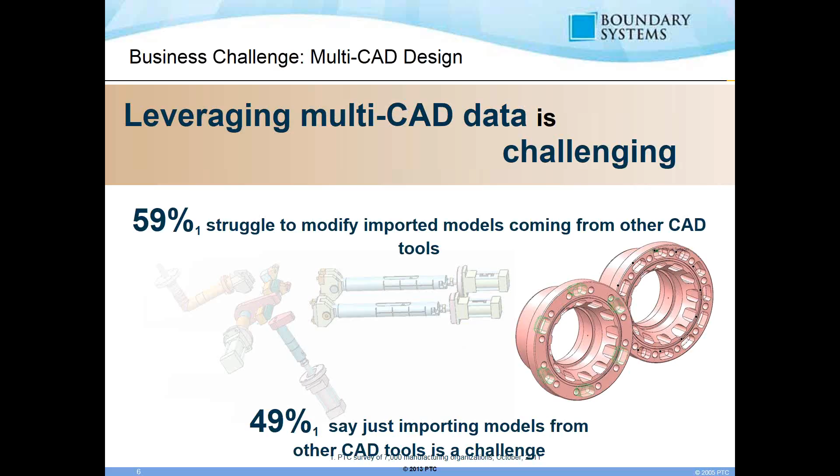Leveraging Creo, users will have the flexibility to make fast changes to geometry from any CAD source, essentially eliminating their MultiCAD challenges. These changes are similar to direct modeling capabilities, solving the challenge of editing non-native heterogeneous CAD data. In other words, I don't care what the feature was in the other CAD package that designed the geometry. All I care about is moving a certain edge or face over by a couple inches, without having to understand whatever the other software was, be it Catia, NX, or Solidworks. I don't have to know how to model in those. I just want to change the geometry, and I can do that very easily now inside of Creo Parametric.

Another benefit is managing change, particularly late-stage design changes. Change is prevalent throughout the entire product development process, but the closer we get to production, the bigger the impact of late-stage design change typically is, so it's critical that it's done quickly, so required tooling, manufacturing, and other downstream deliverables can proceed as planned.

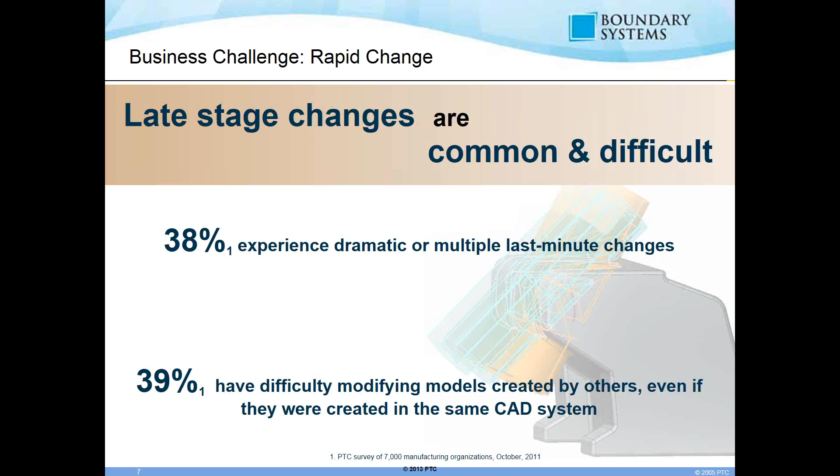The other challenge is migrating data. Company A acquires company B, and now they want to transfer CAD data from one system to another, and usually at that point it's paying for very expensive migration software, or paying for lots and lots of man hours of computers and servers churning out hundreds of thousands of CAD data from one software to another.

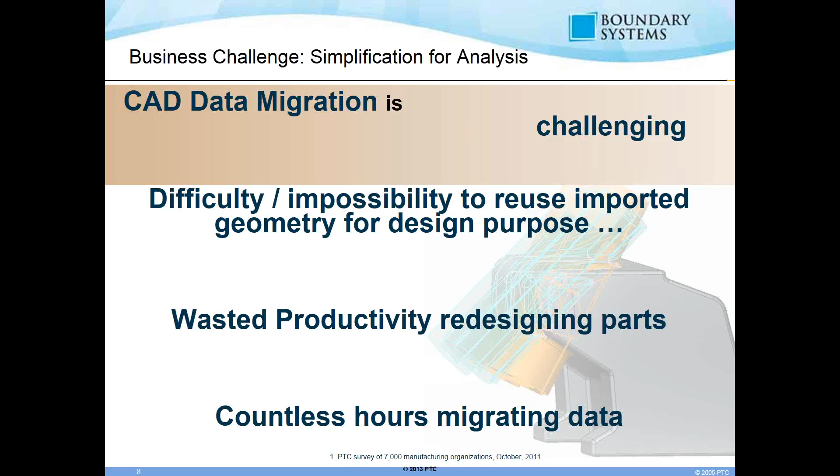PTC Creo Parametric virtually eliminates that particular need because Creo Parametric can very easily open MultiCAD data from Catia, NX, and Solidworks. This means you can start making changes or migrating your data on the fly. You don't have to spend a ton of money migrating all the data up front, only to find out you only use 10% of it. As you need the legacy data, you can migrate it into Creo Parametric, open it natively, and start making changes to leverage that information to create new and better products in the future.

At this point, I'll pause for a second here and get into a live demonstration of the software.

All right, so we'll go ahead and get started with the demonstration portion here. Now, currently what I have opened is a SolidWorks part, but I'll actually close out of it and get back into it again, just so you can see how easy it is to use and leverage MultiCAD data in Creo. So right now, what I'll do is I'll open a couple of different data from different CAD packages, and we'll work with them almost as we're working with native Creo files.

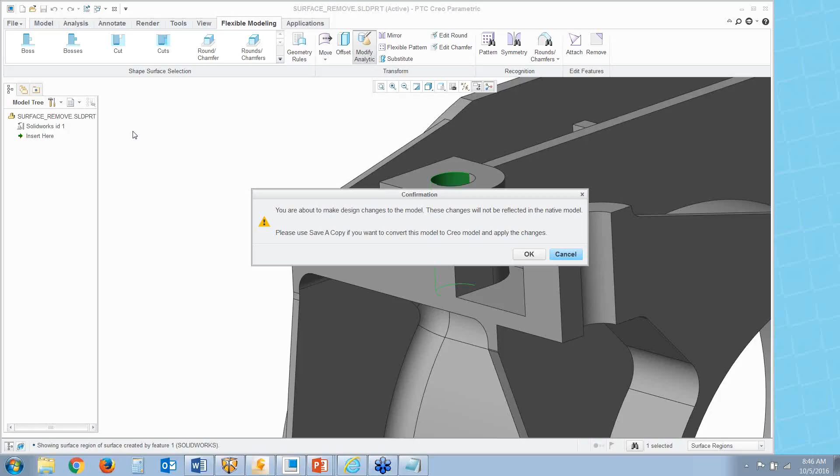And that's simply because, if we could very easily model and edit everything that SolidWorks can and save it back in SolidWorks, then there would be no need to have SolidWorks. And so this just shows that there's a data translation inside of Creo that's taking on all that burden of modifying the geometry as you go along. And so we'll just go ahead and hit OK right here, and now we are free to modify this geometry however we want. Say, for example, we want to make this a radius of 24. We can very easily set that and be on our way.

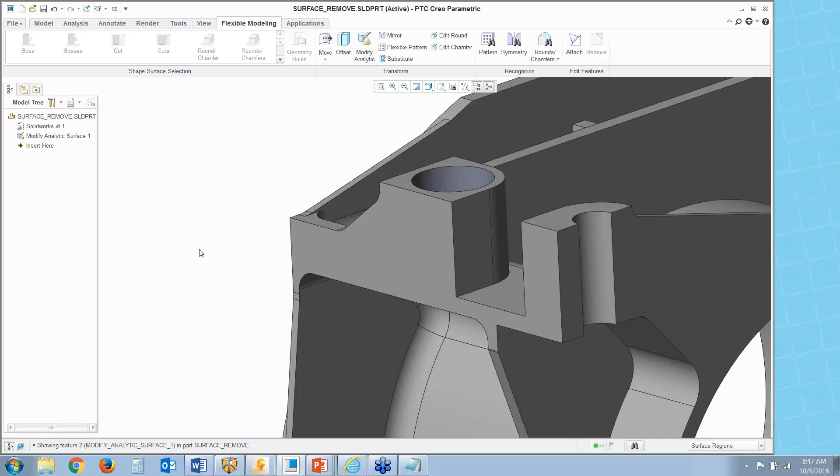Next, for example, would be, let's see here, we'll switch it over this way. And let's say, for example, we want to modify some rounds. We want to manipulate some rounds. Say they're either too big or too small, right? We can very easily pick on those and then start to edit them. And we can make them smaller, bigger. We can even select multiple rounds and change them all at the same time.

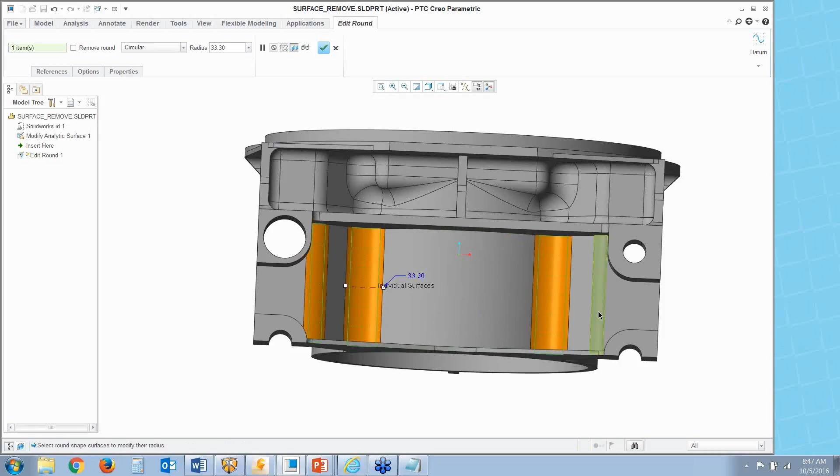Another example would be, say you want to push or offset a surface by a certain amount. You want to move a surface over or thicken or reduce the thickness of a particular wall, right? That's very easy to do now inside of Creo Parametric because you can very easily use some very simple geometry editing features to modify the geometry as you wish, and it'll always respond to you in real time. Right? What if I want to rotate that surface this way? You can very easily do that.

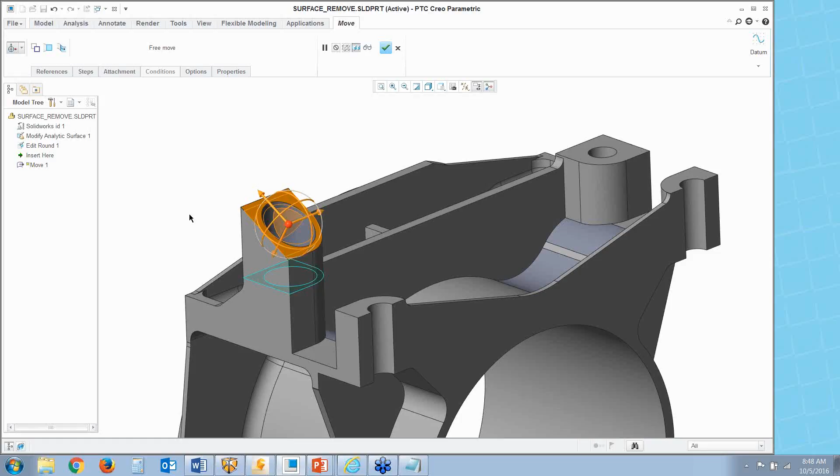Now, some of you probably look at that and think, okay, yes, that was just a freehand move. What if I want to have a hard dimension to my move? What if I want 10 inches offset and no more or no less? Well, again, it's very easy to do that. So we'll go ahead and show that in this example here.

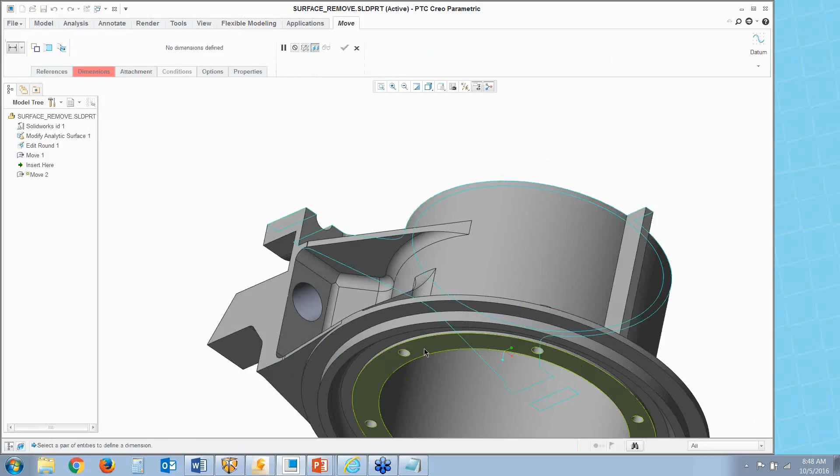And we'll just go ahead and say, hey, let's look for the distance between these two surfaces. And now we have a dimension that we can very easily manipulate and change. Let's say we want to make that 255, so that, in this case, that suits our design intent. You'll now notice very easily that Creo changes the data, and we still have our full CAD model that's now completely edited. And now that distance there is set to 255.

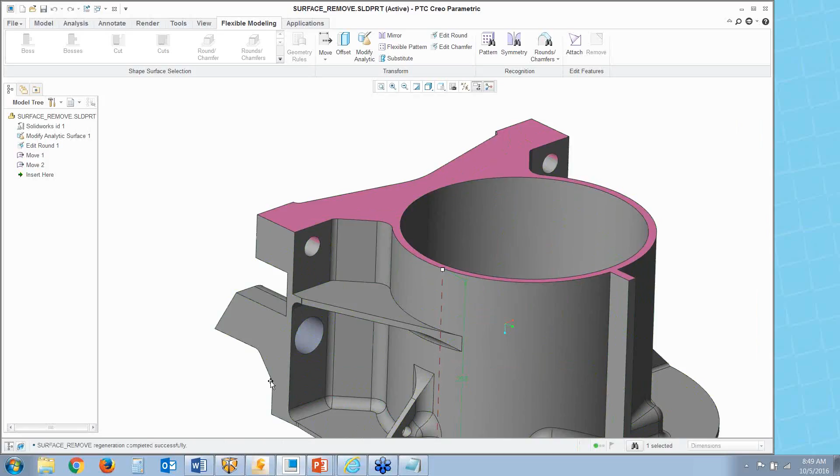Now I'll actually pause on this point and show what's going on, because it's fairly easy to miss the point that what we just created is a feature that now is editable inside of Creo, almost like a native CAD feature. This is almost like a native extrude in Creo. You can double click on that dimension now and set it to whatever you want, and the Creo model will regenerate almost like it's a native feature, right?

And so what we basically have in this case is we're building back intelligence into a dumb solid, into a part that when we opened it up initially was just a typical SolidWorks part with no model tree history to it at all. And now as we begin to make these different changes, Creo says, hey, I'm going to remember what you're changing, so that way if you want to modify the change or remove the change, you have the history right there. So we're basically building back intelligence into a dumb solid as well.

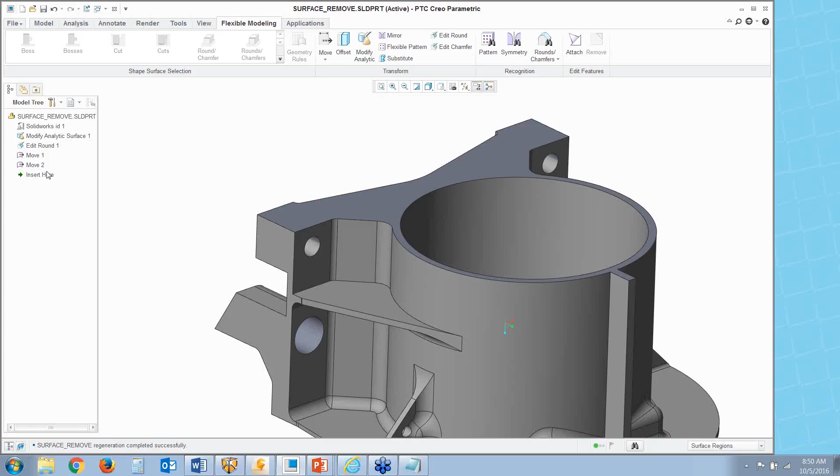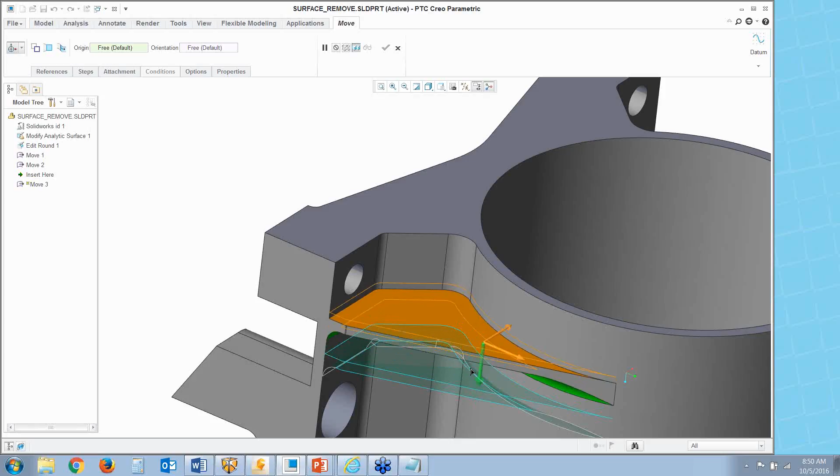Okay, so next we'll take a look at this particular rib right here, and you'll notice there's a fairly complex round at the bottom of this rib. But whenever we go ahead and manipulate this, we'll pick on only the rib itself and move it. And you'll notice that Creo is intelligent enough to understand that, hey, the round is connected to the rib. I'm not just going to leave the round there as an orphan. If I'm moving the rib, I'm going to grab the round as well with it.

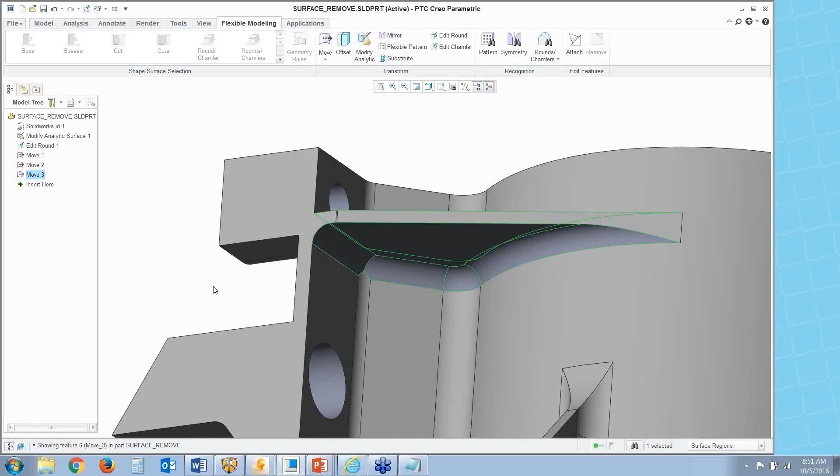Which basically means that this is a very robust geometry editing tool. This isn't the case where you're going to spend countless hours figuring out how to manipulate the geometry, or you select something that doesn't work because the software doesn't troubleshoot itself. In this case, the software is very robust. It understands what you're trying to do, and it will even cover for cases where you don't select all the required geometry, like in this case where it automatically grabs a round as well with it.

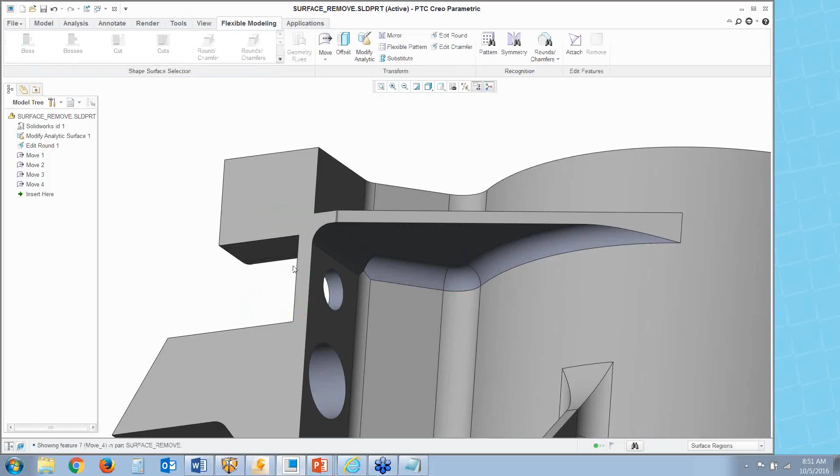In fact, what if we want to take this rib and pull it down even further while we're in the process of making huge changes? Let's make the changes as big as we can. In this case, you'll notice now that hole is completely removed from over there.

Now, another typical myth-busting thing about Creo Parametric, and this is one of the reasons why I love it, is the fact that with these new tools, you can begin to do things that prior to this were not easy to do or not even possible. And so, as anyone will tell you, it's next to impossible to place a draft on a surface that's already rounded off, like this case over here.

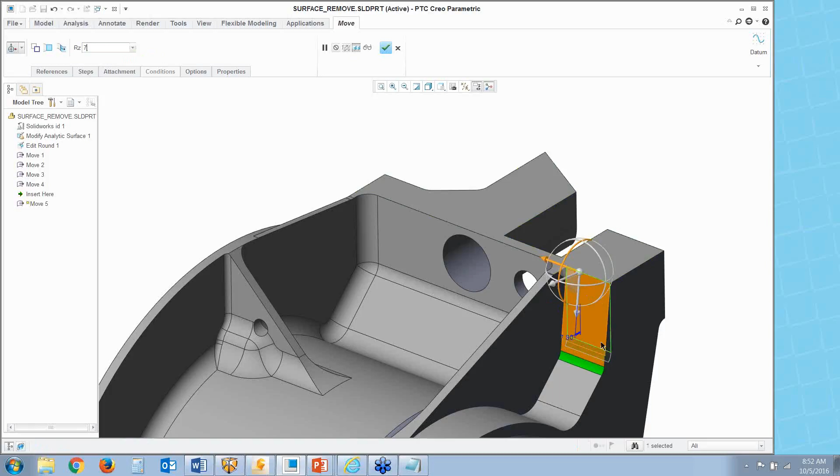Well, in the case of this software, it's very, very easy to do. We can just simply tell Creo, hey, let's add, I don't know, say, a 7-degree draft on that face, right? Very simply, very easily, with about 3 clicks.

Another example could be, let's say we want to get rid of some rounds, right? So the customer has some rounds in certain areas that we want to delete or get rid of. It's very easy for us to just go ahead and select those and then get rid of that. And likewise over here as well.

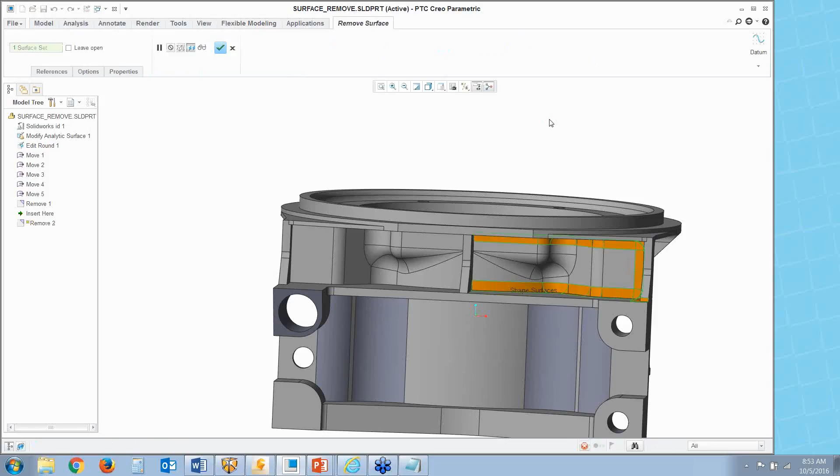And then also, we can come over to this right here and say, for example, we want to get rid of this rib. If the customer put the rib there, you really don't need it. It's just going to add more material, or it's detrimental to the design. So we can very easily select on that and say, hey, let's get rid of it. And it's almost like it never existed.

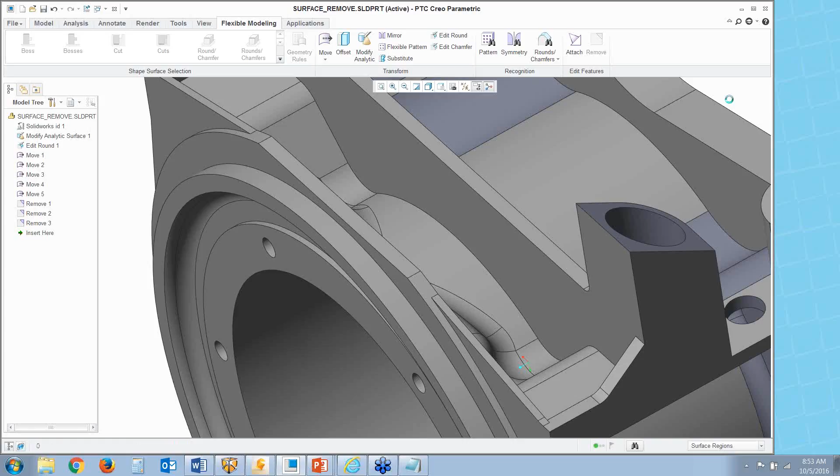Again, you'll notice everything I'm doing here, I'm manipulating this model almost like this was something created in Creo, but it was not. This is an entirely dumb solid that we're now building intelligence into and tweaking it to fit our needs, depending on what change we want to make as a late-stage design change, or even readapting this to fit another design scenario in the future.

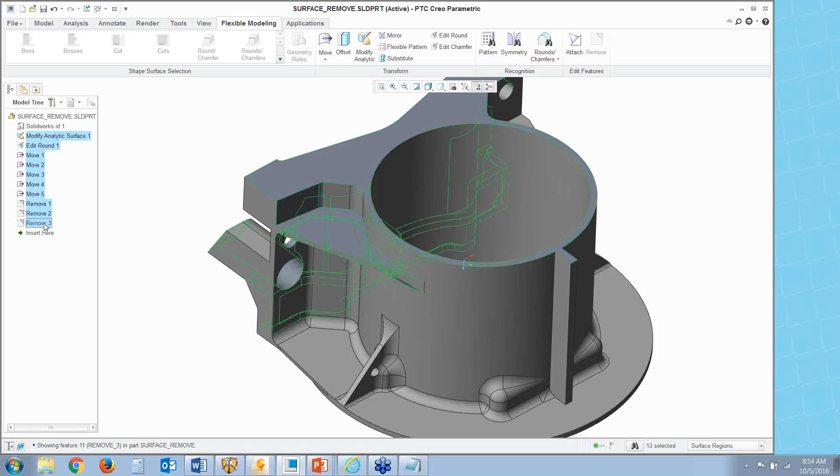Now, the beautiful thing about this is all these different features remain or live in your model tree, and so you can either manipulate each one there, or if you want to go back to your CAD model as it initially was before any change was made, you can very easily get rid of all those different features, and you have your SolidWorks model as you started off with before you ever made any changes to it.

Right? So it maintains your feature history, making sure that you don't have to go back and redo work to undo something that you did manually. You can very easily revert back into it and make a change that propagates through the entire model.

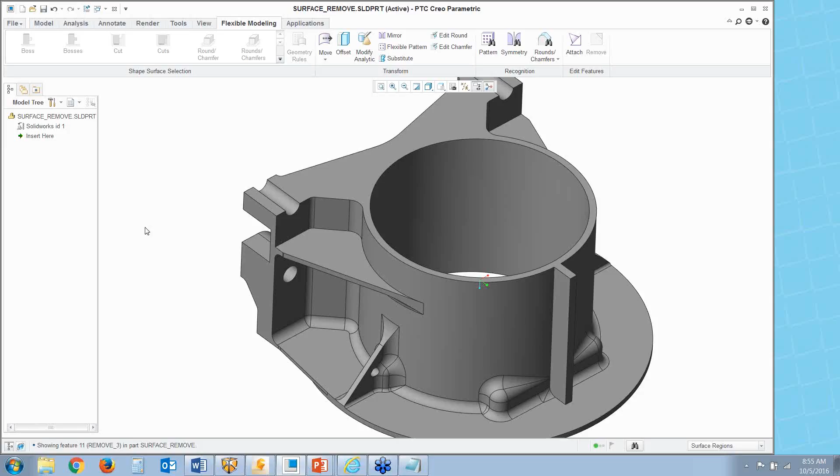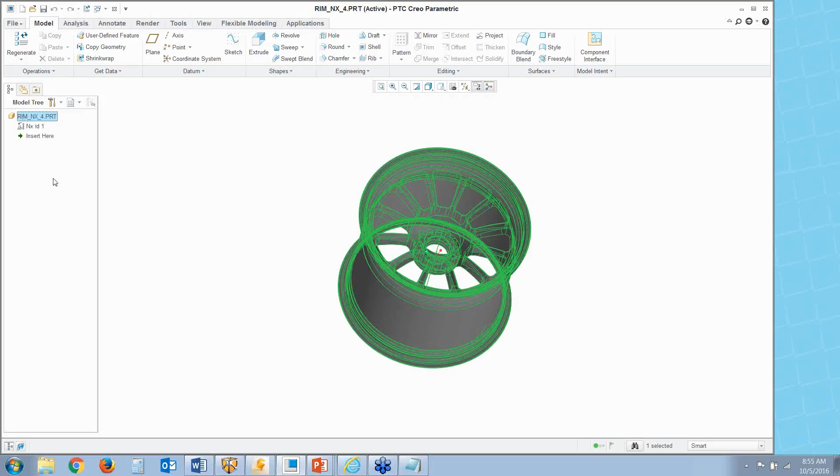All right, and so I'll pause here and I'll switch from this model and open an NX file. In this case, you'll notice this is an NX model of a rim, and we'll go ahead and open this almost like it's a native Creo file. You'll notice in this case, it comes in as an NX file with its own symbol and no model tree history to it at all. But again, we can very easily start modifying this as well.

So say, for example, the customer got too happy and put way too many holes for bolts through these different areas. Well, it's very easy for us to select on those. And then from within Creo, we can start to understand what's going on. We can build back intelligence into the model and tell it, hey, let's do a pattern recognition, and you'll notice Creo automatically analyzes the geometry, understands that there's a pattern there, and we can now even modify the pattern.

We can say, what if we want to cut down that number in half? We can very easily start to modify the pattern there in the future. Again, I'm modifying this pattern like I'm using NX, but really I'm not. I'm just using Creo and I'm editing the geometry. This is something that you would not be able to do otherwise if you did not have Creo Parametric.

Now, the other thing to mention as well is that I'm doing everything right now from within this one tab over here in Creo Parametric, but if you're already used to the different Creo tools like the extrudes, revolves, sweeps, blends, holes, and things like that, you can use all of those features just as is as well. You don't have to selectively learn new features that you don't currently already know. All the part creation features and tools inside of Creo Parametric will work in a non-native model to generate new geometry.

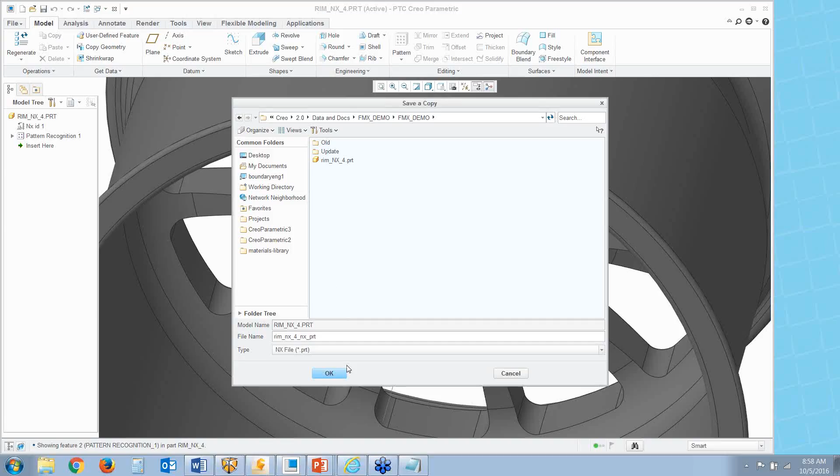When the customer opens this, it's basically guaranteed to open because you're opening something that to their CAD system is native. Or in this particular example, this rim is an NX file, so I can very simply save that back as an NX file. And now my change with the lug nut pattern will pass on to my design partner that's collaborating with me on this part.

So at this point, we'll go ahead and close the live demo here, and we'll switch back to the questions and answers. But before we get to questions and answers, we'll just go ahead and recap what we've just talked about right now.

So what we've just seen is that Creo Parametric provides the ability for you to edit non-native CAD geometry. And so that way you can make late-stage design changes very quickly and easily. You can add drafts where you need to. You can offset faces where you need to. You can delete features where you need to. You can delete geometry where you need to. And so you can make changes very quickly to heterogeneous CAD data, and you can also save it back as a non-native file, so that way you can support the collaborative design effort with someone else on another CAD system.

You can also rebuild back into the CAD model some design intent. So basically it comes in as a dumb solid, and you don't have to sit there understanding what the other guy did, or you don't have to sit there tweaking the model. You can rebuild back patterns and rebuild back intent into the CAD model, so that way it behaves as a responsive, parametric, intelligent model once again.